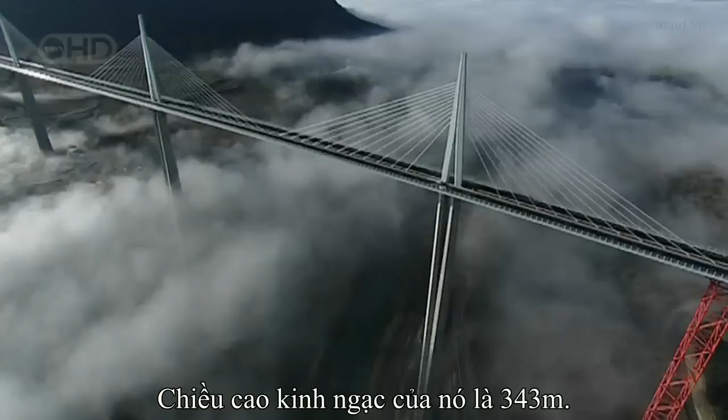This is the Millau Viaduct, the tallest bridge in the world. Its highest tower stretches a staggering 343 meters. So high, the bridge glides above the clouds. But this is a megastructure they said couldn't be built. When I first showed the drawing of this bridge, they really thought I was crazy.

The team attempting to build this amazing freeway in the sky had to survive landslides, fight winds gusting at 130 kilometers an hour, and weather massive storms as the bridge simply hung in the balance. It's a bridge that pushes the boundaries of engineering to the limits, and then beyond.

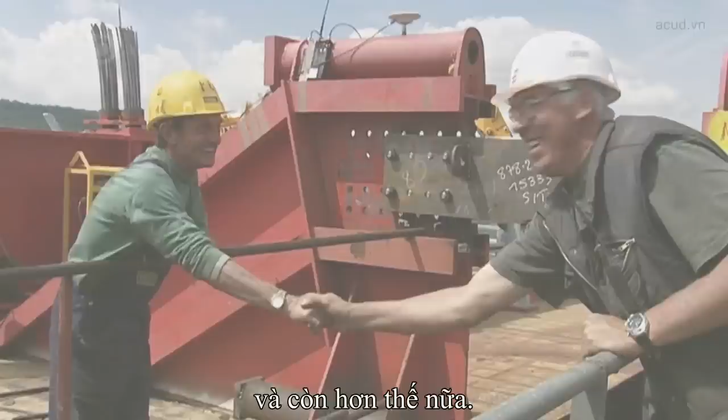Imagine building a series of Eiffel Towers, then slinging a 4-lane highway between them, all the way across one of the deepest valleys in France. Impossible though it sounds, that pretty much describes the building of the Millau Viaduct.

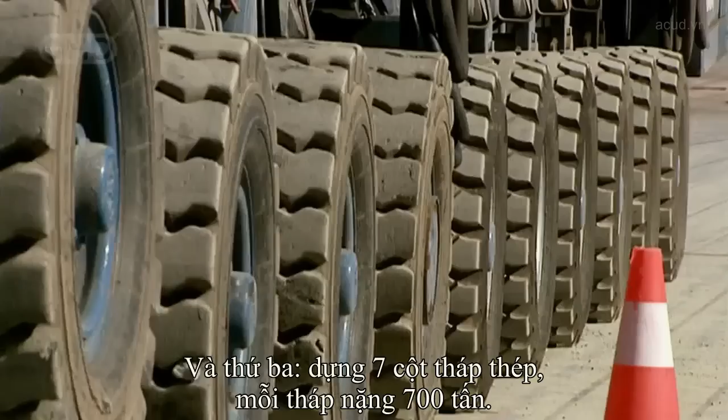From the start, the construction team faced 3 daunting challenges. 1. Build the tallest bridge piers in the world. 2. Put a 36,000-ton freeway on top of them. And 3. Erect 7 steel pylons, each weighing 700 tons. And what's more, they had to do this hundreds of meters above solid ground. So high that if you were on top of the Eiffel Tower, you'd still be looking up at this awesome bridge.

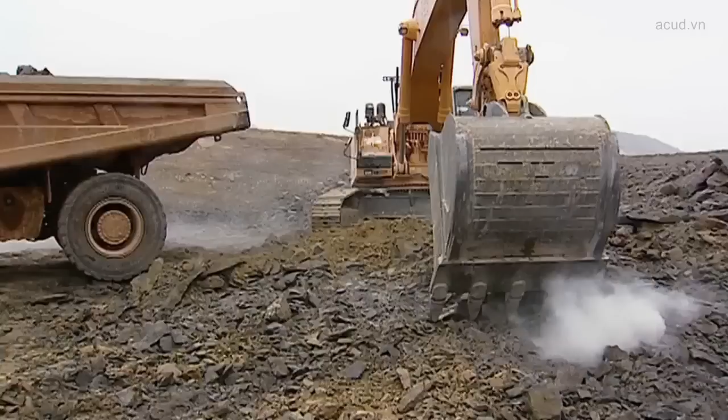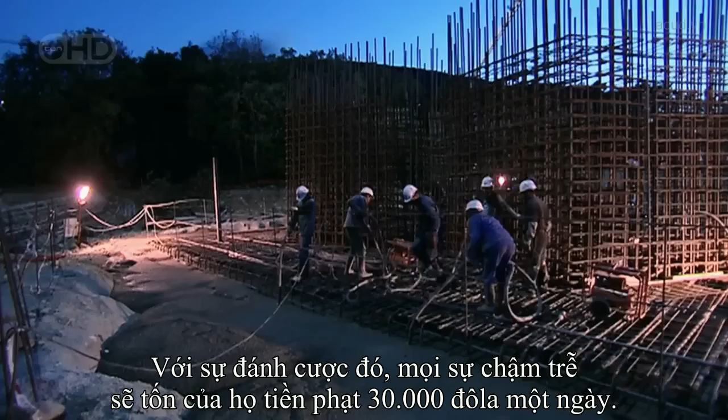October 2001, the team break ground. They're required to build a bridge that'll last for 120 years. And to win the contract, the team promised to build it in record time, less than 4 years. By comparison, the world's longest suspension bridge, the Akashi Kaikyo in Japan, took a full 10 years to build. To up the ante, any delay will cost them $30,000 a day in penalties.

There are 7 piers that are numbered from the northern end of the valley. Number 1 will pose problems because of the steep slope. Number 2 will be the biggest challenge since it's the tallest. Crossing the river, number 3 is not much shorter. Then 4, 5, 6, and 7 climb the gentler slope to the south.

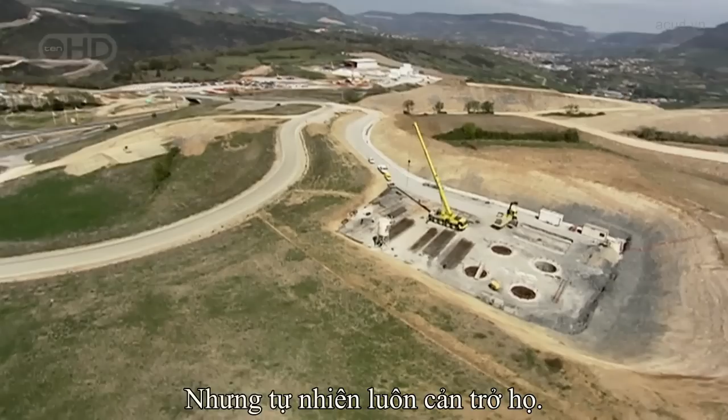To begin, the team had to bury the foundations deep in the bedrock in order to support the enormous weight the bridge will place on them. But the forces of nature were stacked against them. Geologists have warned of the risks posed by the region's fractured limestone. The rock is full of cavities that are essential to the local cheese economy. These cave systems, close to Millau, are home to a unique bacteria responsible for the blue mold in the world-famous Roquefort cheese. But what's perfect for cheese could be disastrous for a megastructure.

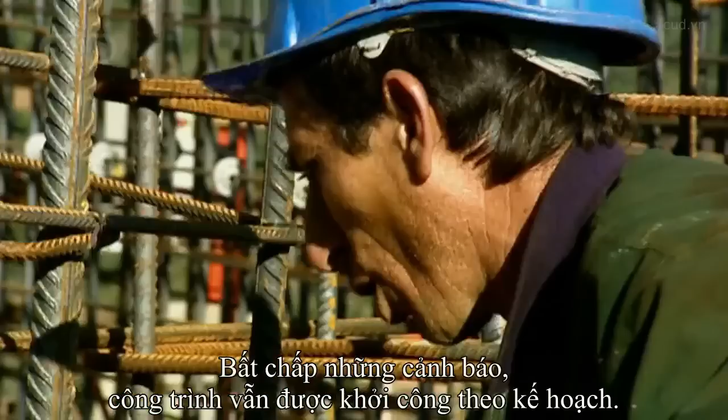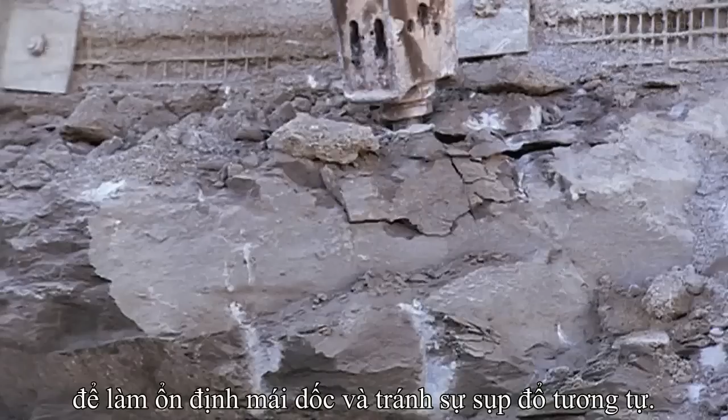The geologists' diagnosis spelt one thing: landslides. This kind of catastrophe could jeopardize the entire project. Despite the warnings, building went ahead as planned. Then, well into construction, as predicted, a dramatic storm causes a landslide. 4,000 cubic meters of rock collapse around Pier 1. Fortunately, the fallen rock doesn't damage the pier, but the warning is clear. They're forced to divert precious manpower and equipment to stabilize the slope and prevent a repeat collapse.

So if the area is prone to landslides, why did they build the world's tallest bridge here in the first place? The answer is simple. In the 1980s, France built a freeway linking Paris directly with Spain. This major artery headed south across the French countryside, while from the Mediterranean, the freeway headed north, until they both hit one of the deepest valleys in France and stopped dead. Welcome to Millau, France's least favorite bottleneck.

The town of Millau is in the mountainous region of the Massif Central, one of the most tranquil parts of France. But in summer, this poor medieval town suffered traffic hell. The locals couldn't take it anymore. Neither could their mayor. It was terrible for our reputation. When you hear every day on the television and radio, avoid Millau, there's a traffic backup, a 5-hour wait in Millau.

And it's not just the people of Millau. Two drivers, Jamila and Jemima, crossing the 30-odd kilometers between the freeway on either side of Millau, reveal exactly why this bridge is needed. Jamila, in car 33, will cross the new bridge, while in car 22, Jemima will take the old road across the valley floor. Getting straight on the freeway, car 33 approaches the Millau Bridge after just 18 minutes. The only delay is the 30 seconds it takes to get through the toll booth. Then driving at 100 kilometers an hour over the spectacular bridge, she takes just 32 minutes to get to the other side.

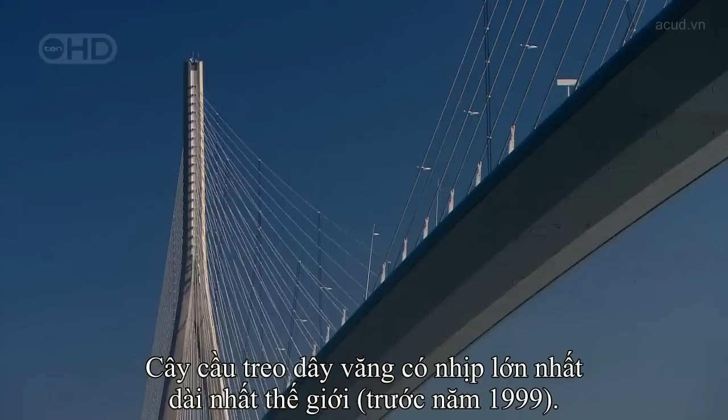12 years before construction began, up in Paris, the Ministry of Transport first came up with a plan. Their head bridge builder, Michel Virlogeux, is no ordinary engineer. He's a man who thinks big, very big, like the Normandy Bridge in northern France, the longest cable-stayed span in the world. With this record-breaking structure completed, Virlogeux was on to his next, Millau. His plan, another cable-stayed bridge, but pushing the technology beyond anything previously attempted, with piers 4 times higher than the Normandy Bridge.

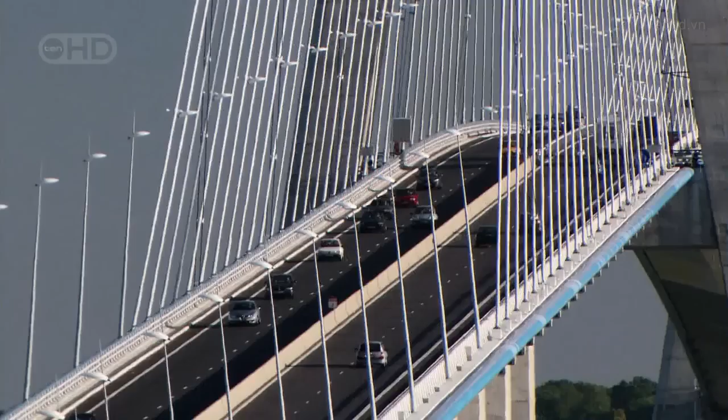The Millau Bridge would not only be the world's tallest, it would be unlike any bridge ever constructed. When I first showed the drawing of this bridge to the authorities, they really thought I was crazy. Virlogeux's Normandy Bridge has 2 sets of cables supporting the deck. But he wanted to up the stakes for Millau by losing 1 row of cables, so the remaining line would be forced to do twice the work.

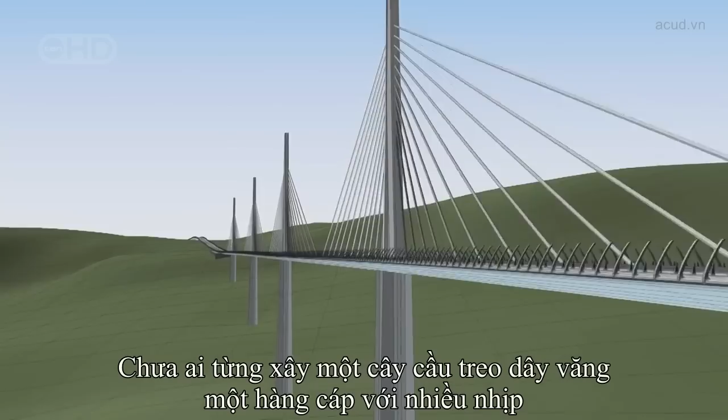More dramatically, the 2.5-kilometer Millau Bridge, instead of having a single main span, needed a whole series of piers to support it across the valley. No bridge builders had ever attempted a multiple-span, single-line cable-stay bridge on this scale before.

The French authorities had a problem. Nervous about Virlogeux's groundbreaking scheme, they held a competition inviting other engineers and architects to compete with different designs. The winner, Lord Norman Foster, is one of the world's superstar architects. In Hong Kong, he built the world's largest airport terminal. In Barcelona, offices literally hang from a mast on his communications tower. This is a man who regularly contemplates the impossible and delivers.

You know, it's the challenges, and it's one challenge on top of another, on top of another. And with Millau, one of the biggest challenges was making it fit into the landscape, given it's just down the road from the famous Gorge du Tarn, France's equivalent of the Grand Canyon. How do you make something which has to be so immensely strong against the forces of nature look very gentle, very delicate? How do you weave something on that scale into the most unbelievable landscape?

Ironically, Foster's answer was to take Virlogeux's pioneering scheme, then push it one stage further. He turned an elegant piece of engineering into a delicate work of art by boldly cutting out 2 of the 9 original piers and seriously slimming down the remaining piers and road deck. Foster wanted the bridge to appear as delicate as a butterfly, but this butterfly has to support the weight of 5 Eiffel Towers in gale-force winds hundreds of meters above the River Tarn. Getting the design wrong would be a disaster.

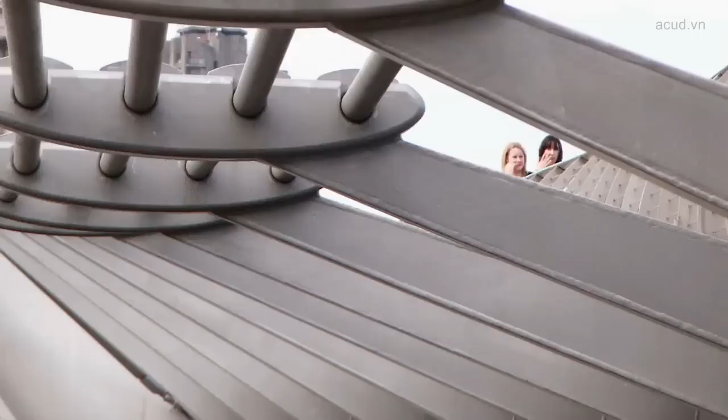Then, with Millau still on the drawing board, Foster's record as a bridge builder suffered a major setback. His Millennium Bridge in London is actually another record-breaking structure, the lowest profile suspension bridge in the world. But when this footbridge opened to the public in June 2000, it was a public relations disaster. Crowds walking over it set up a resonant frequency, and the bridge began to sway. As people adjusted their step to the small initial wobble, the effect was magnified.

Though it didn't threaten the structure, the swinging motion became so dramatic, the authorities closed the bridge for a refit that took 1.5 years and ended up costing over $8 million. It was a bad omen for the Millau Bridge, where construction was soon to begin. And at 15 times the height, a design flaw would be a catastrophe.

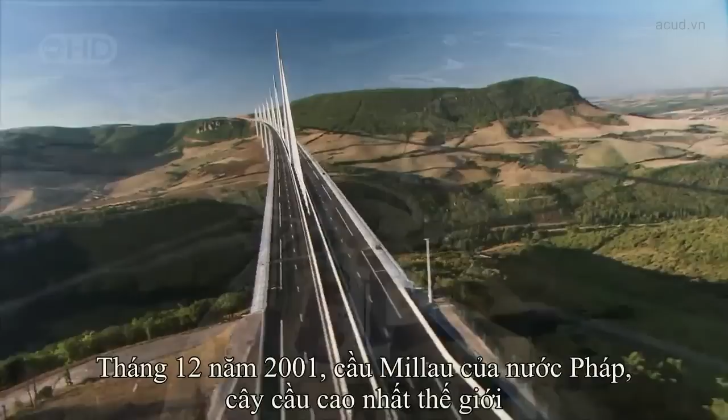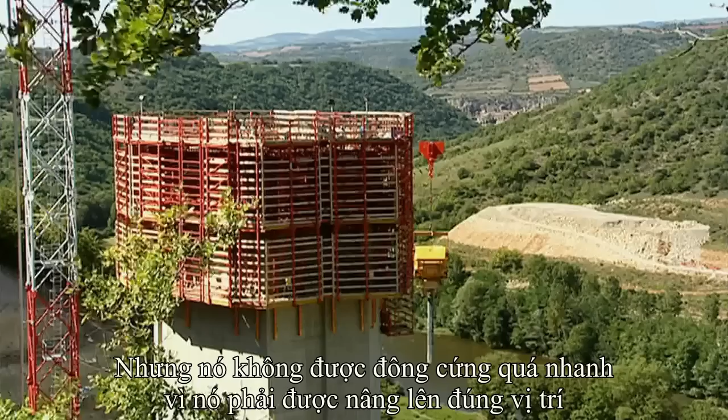December 2001, France's Millau Viaduct, the tallest bridge in the world, is under construction. Everything about this project is supersized. It'll need 200,000 tons of concrete, so much that the team have to build a concrete factory on site. But there's nothing straightforward about this concrete. The formula must be just right. It needs structural strength to support the massive loads it'll have to bear. But it can't set too quickly, as it has to be hoisted into position and poured hundreds of meters in the air. And it needs to be just the right color to suit Norman Foster's vision.

In fact, the architect's vision has created a headache for the construction team. He's designed each pier as a complicated geometric shape, tapering the entire way up with vertical grooves set into them to create shadows. But what's just a line on paper for the architect was a major challenge to build.

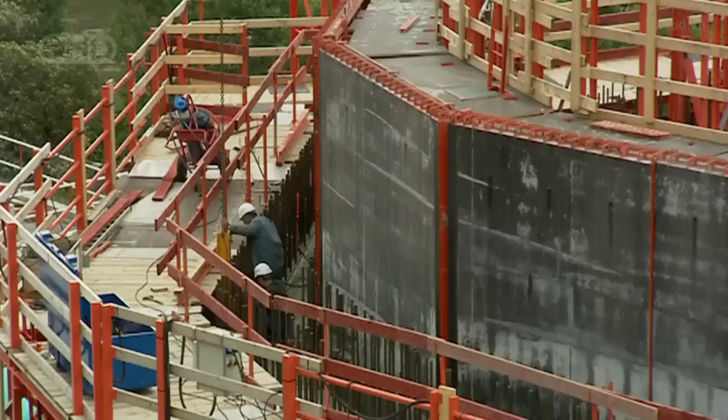The enormous piers are built step by step by pouring concrete into a temporary mold. To give the required strength, the molds are filled with a frame of steel reinforcing bars. In total, 16,000 tons of these steel bars are hoisted into place and secured. Laid end to end, they'd stretch the 4,000 kilometers from Millau all the way to Central Africa.

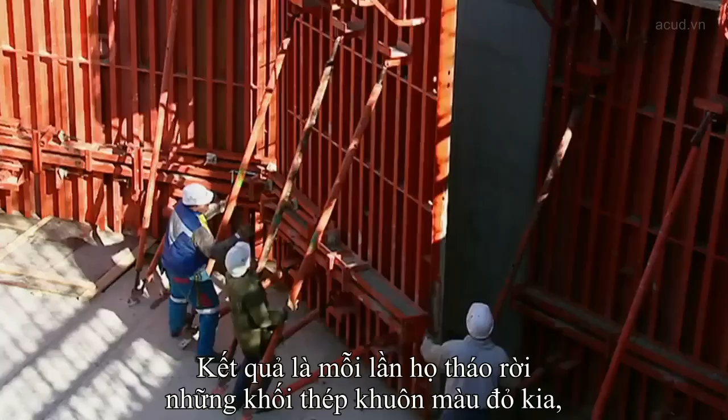The shape of each pier is seriously complicated. As a result, each time they remove the sections of red steel shuttering, they have to change the shape of the mold to fit the profile of the next 4-meter section. Manhandling these steel panels, weighing up to 15 tons apiece, is no picnic. And with the combined height of the 7 piers totaling well over a kilometer, they have to change the shape of the mold over 250 times.

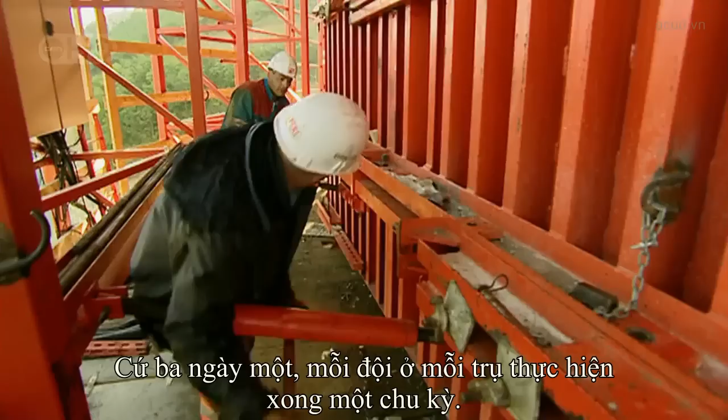Every 3 days, each team on each pier went through this whole cycle. Then they repeated the process. But it was a race against time, with a permanent threat of delay. Keeping the entire build on time and to budget was the daunting responsibility of one man, Jean-Pierre Martin.

If instead of 3 days we took 4, imagine that multiplied by the number of castings. We'd end up with a 3 or 6 month delay. With a penalty of nearly $1 million a month, this isn't something Martin wanted to contemplate. And this schedule wasn't his only headache.

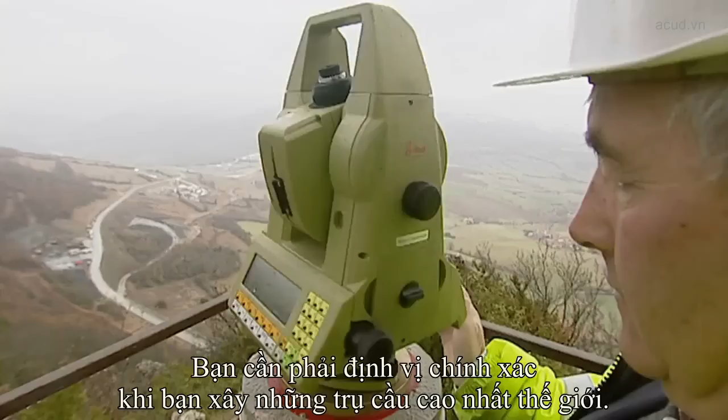You have to be pinpoint accurate when you're building the tallest bridge piers in the world. Get it wrong, and the bridge simply won't fit together. Just 10 centimeters out, about a hand's width on each 4-meter section, and the tallest pier could be 6 meters off at the top, the width of a jumbo jet fuselage.

Each team was aiming for a specific point in the sky. For Pier 2, this was exactly 245 meters above the ground, 546 meters from the north side, and 1,914 meters from the southern end. There was no room for error.

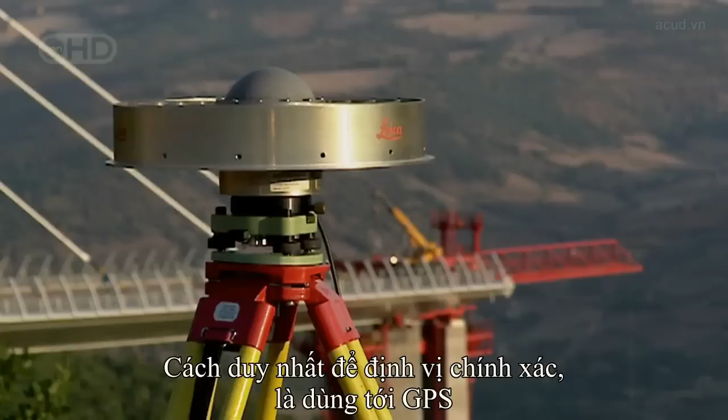The only chance they had to get it right was with GPS, accurate to within 4 millimeters. Using signals from multiple satellites, the team could pinpoint their position and make sure they're on target for that critical point in the sky they needed to hit.

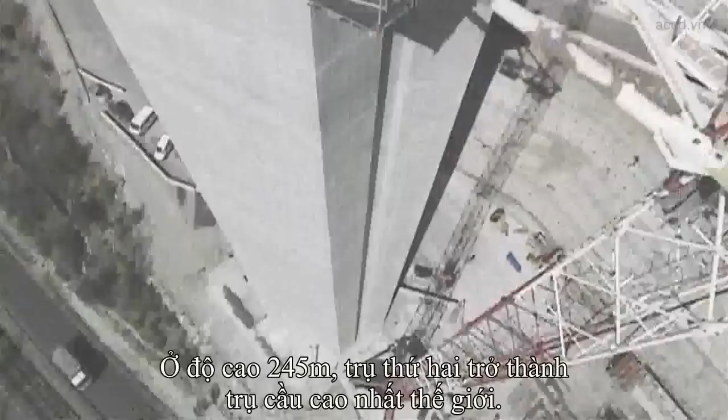Month after month, the piers climbed higher. Finally, by November 2003, they reached their full height. At 245 meters, Pier 2 becomes the highest bridge pier in the world. But is this record-breaking pillar where it's supposed to be? Amazingly, it's dead on target, to within 2 centimeters.

Champagne corks pop. It's time for a major celebration. Against all the odds, they were 1 month ahead of schedule, but the team couldn't afford to relax. The next stage of the project would be the most difficult part of the build.

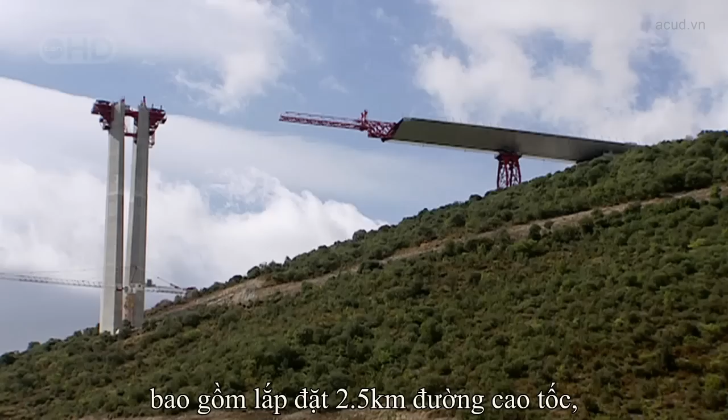Phase 2 of building the world's tallest bridge involved putting a 2.5-kilometer roadway weighing 36,000 tons on top of the piers, a full 270 meters above the River Tarn. Bridge builders know danger comes with the territory, but working at these heights can be lethal.

More than 34 died constructing New York's Brooklyn Bridge. 35 died in 1970 on the Westgate Bridge in Melbourne, Australia. And 1 year later, 13 workers were killed when the Koblenz Bridge in Germany collapsed into the Rhine.

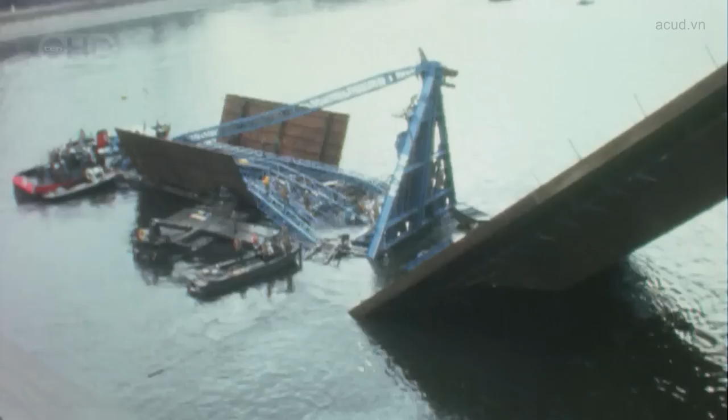With these fatalities in mind, the team decided to fabricate the entire road deck on the safety of solid ground. This meant building it in steel, which in theory would be much safer than lifting vast concrete sections hundreds of meters into position. There's only one problem with this plan. No one had ever put a road deck on piers anything like this height before, let alone over a 2.5-kilometer span.

In the end, only one steel manufacturer had the courage to take on this colossal challenge. Eiffel, the steel firm set up by the great French engineer. Eiffel built what was once the tallest bridge in the world, the Garabit Viaduct in southern France, before getting round to the framing for New York's Statue of Liberty and, of course, his signature tower in Paris.

But despite the company's experience, Eiffel's director, Marc Buonomo, knew he was taking a serious risk. It was a gamble for the company, because if there had been a mistake, if it hadn't worked, it would have been the whole company.

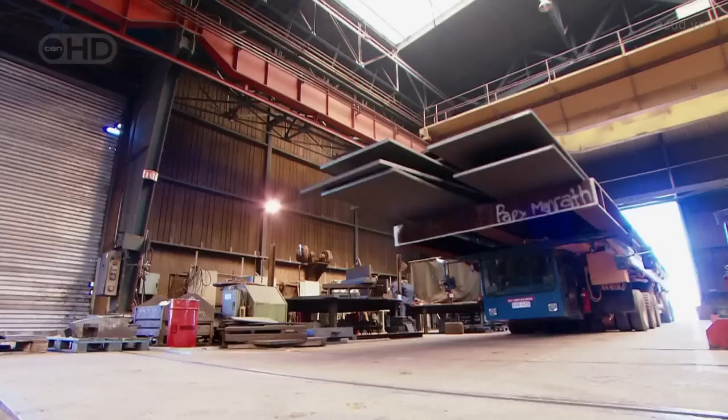They fabricated the massive sections that would make up the road deck in the company's steel factories. This immense jigsaw puzzle involved manufacturing 2,200 separate sections, weighing up to 90 tons, and some of them 22 meters long. Their accuracy is measured with a laser to within a fraction of a millimeter.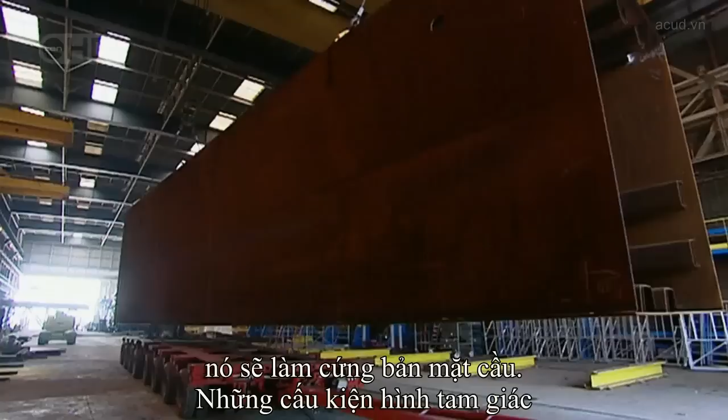The huge square tubes are the central spine that should make the deck rigid. The triangular side panels will be welded on either side to create the width for a 4-lane highway. To meet the punishing schedule, Buonomo automated the manufacturing with a 2-headed welding robot and a plasma cutting machine.

Each cutting pattern or template is programmed into the computer. Then the machine automatically blazes its way through the steel. The torch reaches a scorching 28,000 degrees centigrade. That's 5 times the temperature of the Earth's inner core.

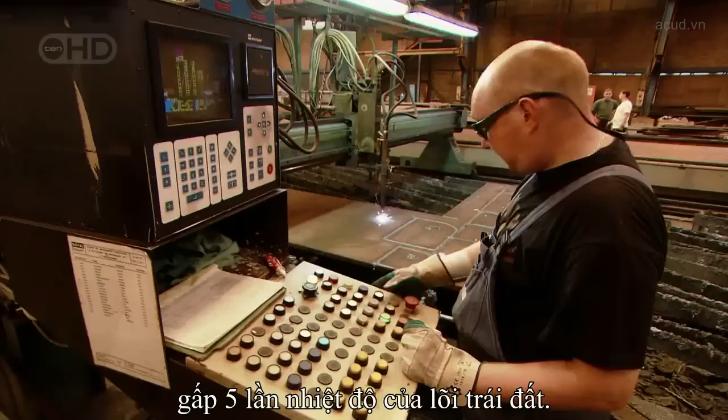But cutting and welding was the easy part. The hard part was getting these monster sections the hundreds of kilometers from the factories to Millau. The routes had to be planned with precision to avoid major damage. The police coordinated safety and clearances.

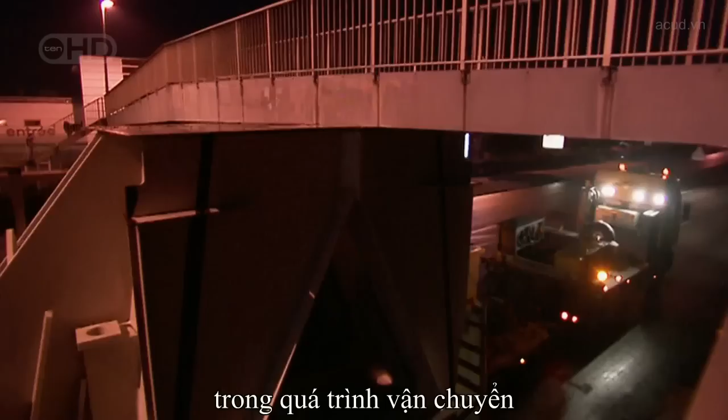Even with that level of preparation, some obstacles felt as if they're cutting it just too close for comfort. And this was no one-off event. To build the viaduct took over 2,000 of these extraordinary road convoys.

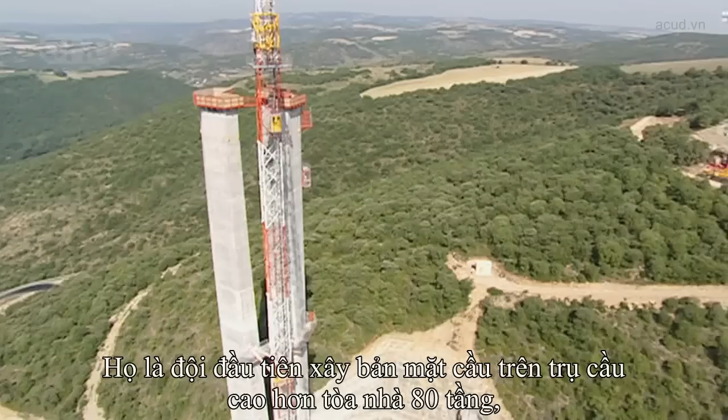The components arrived at assembly plants set up, one on either side of the valley. Here, the pieces of the massive jigsaw puzzle were welded together to form the 2 halves of the deck. But getting these 2 halves to span the valley on top of the world's tallest bridge piers would be a major challenge. They'd be the first team to put a road deck on a pier taller than an 80-story skyscraper.

And pushing bridge building beyond anything attempted before, they planned to slide the entire 2.5-kilometer road deck over in 2 colossal pieces. The bridge's chief engineer, Jean-Marie Kremer, was one of the few people who believed it could be done. All the engineers who know this method, who were in the know, didn't believe it was possible. If the team had got their calculations wrong, the entire structure could collapse into the valley.

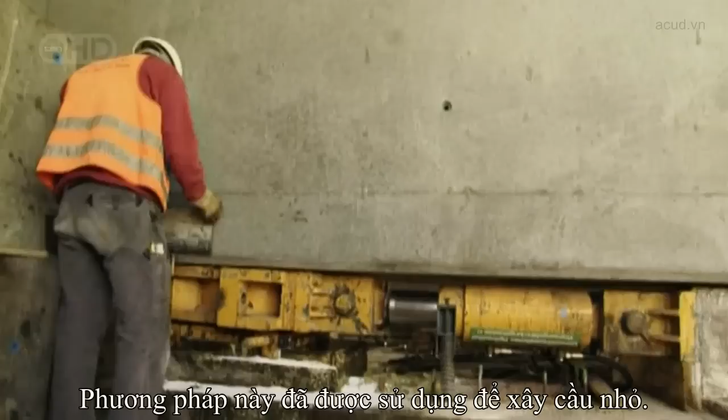We found a solution for the construction, which was to launch the bridge from the 2 sides. One part on the Larzac Plateau, one on the Rouge Plateau. And to push them from the 2 sides and to make them come and meet here above the River Tarn. Smaller bridges use a similar technique. A powerful set of hydraulic rams literally pumps the deck from one side to the other. But Millau would be the longest launch ever attempted over the highest piers in the world, and the results could spell disaster.

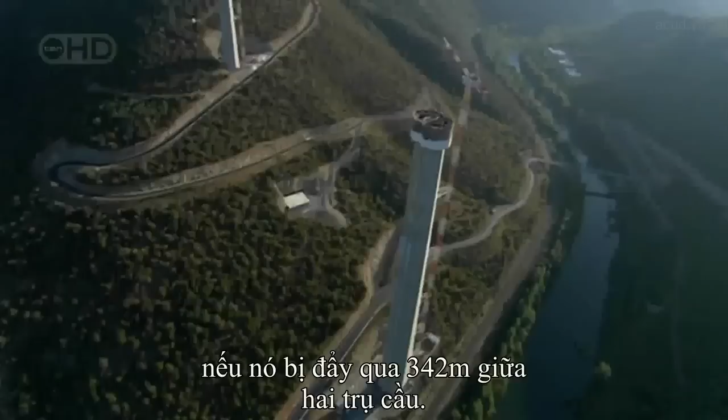The deck is so slender, it would bend and collapse if it were pushed out over the 342-meter spans between each pier. The furthest anyone's previously managed is less than half that distance. The first part of the solution was simple. Fit a pylon so its cables support the front of the deck as it goes out over the valley. Then construct temporary steel support towers that halve the spans to a more manageable 171 meters.

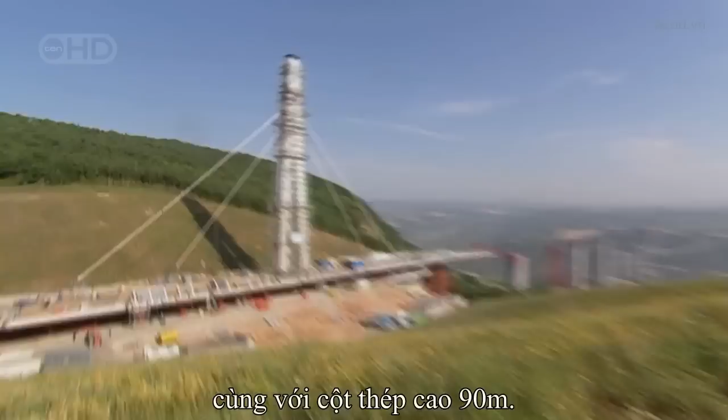These steel towers were a construction feat in themselves. The largest, over 170 meters high, is the tallest ever built, and they needed to carry a massive load. 7,000 tons as the leading edge of the deck, together with the first 90-meter pylon, slide over. And simply pushing this enormous weight over the top of the vulnerable piers would bring them crashing to the ground. This was the nightmare scenario. If we'd done a conventional launch, we would have knocked the piers over like the pins in a bowling alley.

Someone needed to reinvent the way this type of bridge is built. And it's Marc Buonomo with Jean-Marie Kremer who came up with the breakthrough. The basic principle can be demonstrated with a heavy box and a wobbly table. With a normal launch, you knock over the piers. I want to advance the deck over the pier, but if I push the deck from here, I'd knock over the piers, because they're so tall. The idea is to install a launching system on top of the pier, and that way, if I push the deck, it has no effect on the stability of the piers, and the piers won't fall over.

The trick is to use a series of these launching systems to jack up the deck and inch it forward. Each system uses two wedge-shaped blocks under each side of the deck. The upper wedge is pulled forward by a hydraulic ram. It slides up the slope of the lower wedge at the same time, lifting the deck from its supports and advancing it 600 millimeters. The lower wedge then retracts, dropping the deck onto its supports. The upper wedge returns to its original position, and the whole cycle begins again.

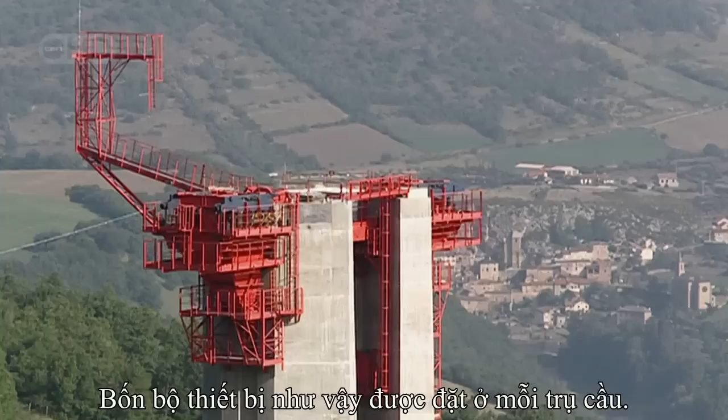4 of these clever devices are placed on each pier, all programmed to work at exactly the same time. The result is that together, they pick up the entire roadway and shunt it forward. But if one fails or gets out of step, it could spell disaster. The force could push the bridge piers apart till they collapse. When you're up there and you see Millau 300 meters below you, you ask yourself, was this a good idea? The future of the entire project was now hanging on a prototype, and it had never been tested.

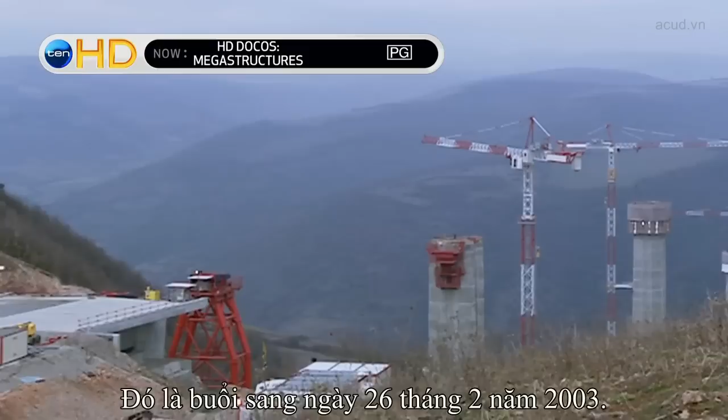It's the morning of February 26, 2003. Do or die day for the world's tallest bridge. Everything is about to be put to the test. The flexibility of the deck, the strength of the temporary piers, and critically, the pioneering hydraulic ram system. Even Buonomo, the man in charge of the launch, had his doubts. As it had never been done before, I have to tell you, I had fears that it wouldn't work.

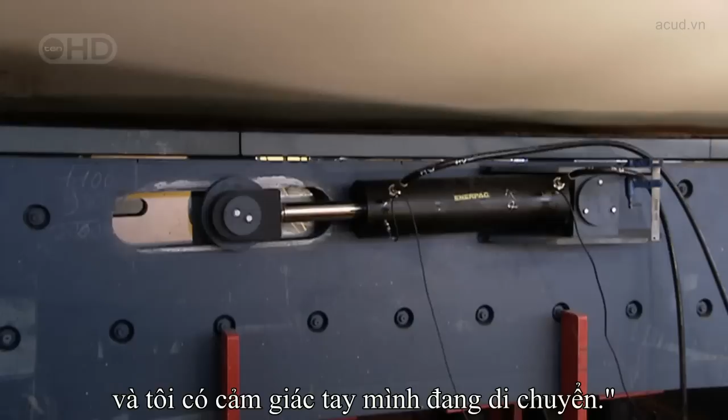The pumps kick in, the pistons start to push, and the deck begins its huge journey across the valley. The moment I heard the motors start, I put my finger on the deck, and I could feel my finger move. Every 4 minutes, the deck advanced 600 millimeters across the valley. Surveyors tracked its progress. But it was still a nail-biting time as they watched the unsupported deck crossing the void.

Eventually, the deck reached the safety of the first pier. 204 meters down, only 2,256 to go. The launching system seemed to be working as planned. The engineers were feeling optimistic.

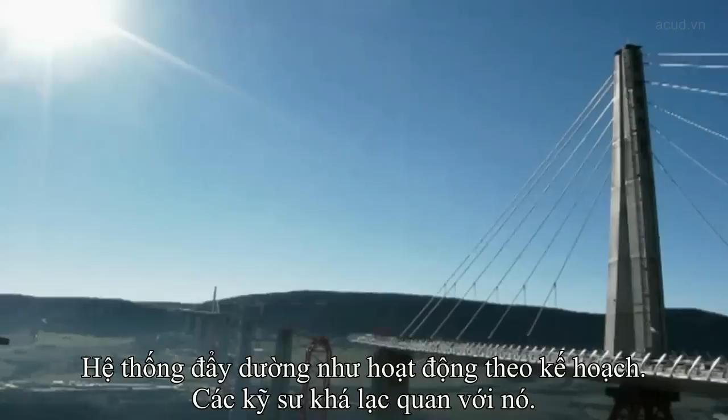But as the deck advances into space, it'll become more vulnerable to the wind, which can reach 130 kilometers an hour. Unfortunately, the road deck has the shape of an upside-down airplane wing, and the team's greatest fear is that this wing could simply take off.

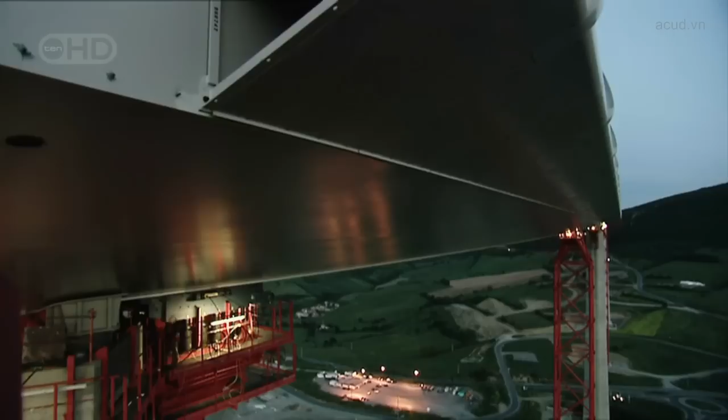The engineers kept a close eye on the wind and weather conditions. When they were satisfied there was a 3-day weather window and the wind wouldn't exceed 85 kilometers an hour, they'd give the construction team the go-ahead, and the deck launch could continue. The reason for this precaution is simple. Strong winds can literally tear a bridge apart.

In 1940, Washington State built a suspension bridge across the Tacoma Narrows in the US Northwest. It opened with a grand ceremony on July the 1st. But the celebrations were short-lived. The bridge had a major problem: the wind. Girders beneath the deck, designed to make the bridge rigid, actually blocked the wind, causing the roadway to ripple alarmingly. Locals soon dubbed it Galloping Gertie.

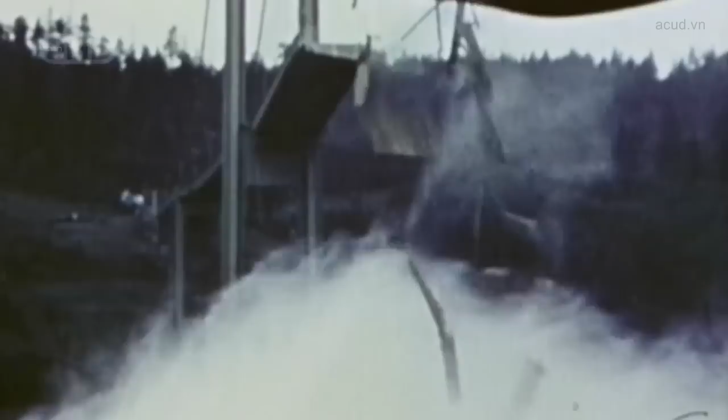On the 7th of November, with the wind less than 70 kilometers an hour, the bridge begins to twist violently. At 11 a.m., time runs out for Galloping Gertie. The wind sends the bridge crashing into the river. Wind tunnel testing is now standard procedure as a direct result of Galloping Gertie.

For the Millau Bridge, they analysed the wind in the Tarn Valley over 18 months, then recreated those conditions in the wind tunnel. Wind engineer Olivier Flamand was shocked by the results. The average wind speed was relatively low, but because there's such strong turbulence, it created very fast peak winds. The rugged terrain creates serious turbulence at the height of the road deck. Winds peak at 130 kilometers per hour. That's hurricane force.

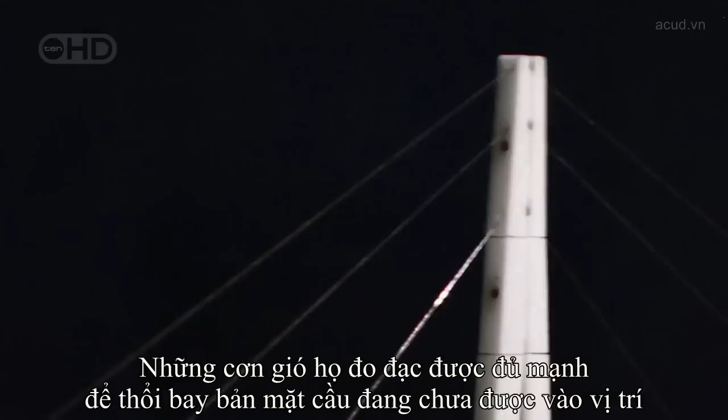They tested every aspect of the bridge to analyze the risks: piers, pylons, and critically the deck. But it's not just the aerodynamics of the finished bridge. They needed to find out how it would behave when it was most at risk, during the launching of the deck. Olivier and his team reached a chilling conclusion. The winds they've measured are strong enough to blow the unsecured deck off its supports and send it crashing hundreds of feet to the valley floor.

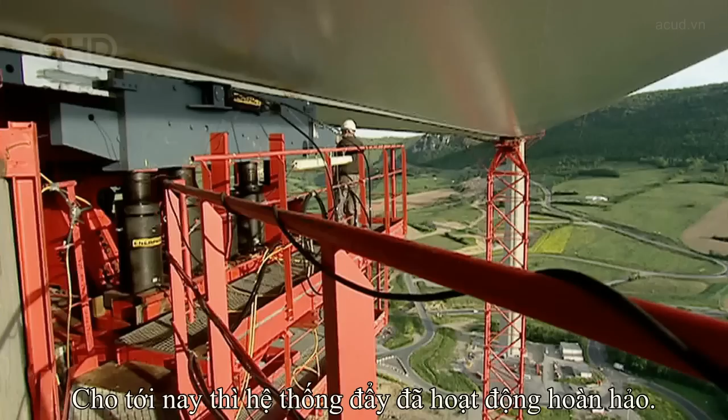And then the nightmare began. On the 22nd of August 2003, 6 months into the deck launch, one of the launch systems failed, leaving the deck hanging in the wind. To make matters worse, the weathermen were predicting storms. So far, these massive pumping machines had worked perfectly. But the fact is they were prototypes, and due to the frantic schedule, they'd never been tested.

The problem was that the non-stick Teflon between the sliding surfaces had ripped, and the friction generated was too much for the hydraulic rams to push against. Unfortunately, no one had planned on replacing parts of this monster machine mid-launch on the top of a massive concrete pillar. This was very bad news for the man who staked his reputation on this system. It was maximum stress, like poison in your mouth. You don't forget that.

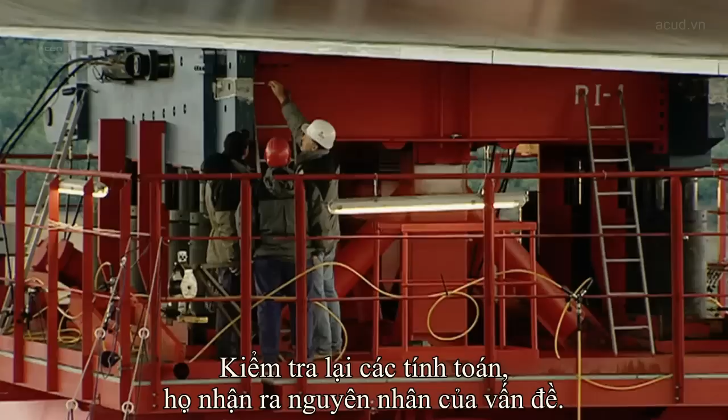Re-examining their calculations, they realized the cause of the problem. They'd underestimated the forces between sliding surfaces, but they wouldn't be able to repair it without the necessary spare parts. The clock was ticking, and Marc Buonomo needed a solution fast. When Apollo 13 came back with that incident, the NASA engineers requested they did the inventory of everything there was on board to know how to fix it.

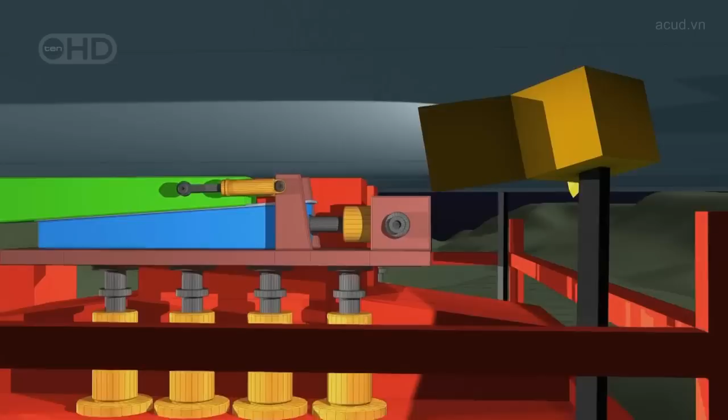The Millau team did an inventory. They realized that the other launching machines, not yet being used, could be stripped to provide the new Teflon surfaces they needed. Working all through the night, the team extended the access platform. This allowed them to take out the 5-meter-long, 2-ton steel wedges, replace the Teflon, and reassemble the launching machine. By 8 a.m. the next morning, it was ready to resume the launch.

The rest of the week, the predicted storms arrived, and another set of launching machines wore out. So when the deck finally made it to the safety of the next pier, the team breathed a major sigh of relief. You don't forget that. I won't forget that for 4 hours I was really scared. The two decks continued their journey across the valley. Day after day, week after week for a full 14 months, they approached each other, millimeter by millimeter.

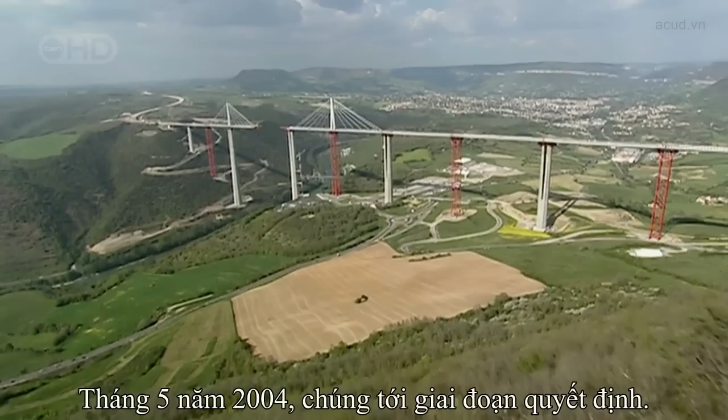By May 2004, they'd reached a critical phase. From the northern end, the shorter deck had traveled 717 meters into space to reach its final resting place. From the south, the longer deck extended over 1.5 kilometers. Only the section over the river, the one point where it was impossible to erect a temporary pier, divided them.

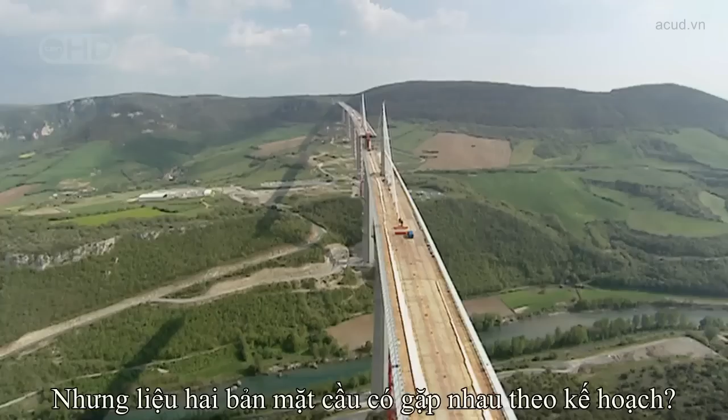But would they meet as planned? If they've got their calculations wrong, they'll have built the biggest white elephant in Europe. Even the man behind the whole project had his doubts. I was not convinced at all that the two parts of the deck could meet exactly with a perfect geometry.

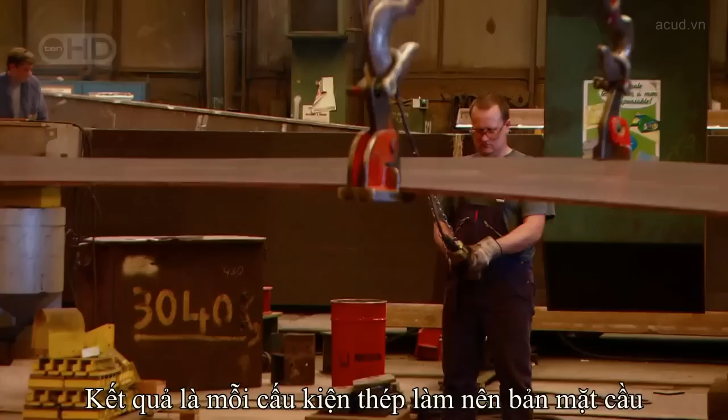The odds were against them. Calculating such a feat so precisely is a Herculean task. Firstly, the two starting points on the northern and southern slopes of the valley are at different heights. Secondly, the bridge has a subtle curve to it. As a result, each steel panel which makes up the road deck had to be cut and welded with extreme precision. It would be an engineering triumph if they got these two sloping curved decks to meet as required.

The team checked the weather reports. With the wind inside safety limits, they gave the go-ahead for the final push. The rams began to drive the deck's leading edge off the safety of Pier 3 towards its destination. At this point, a total of 21 launching systems needed to move at exactly the same moment to avoid disaster. If anything were to go wrong now, the man responsible would be Marc Buonomo.

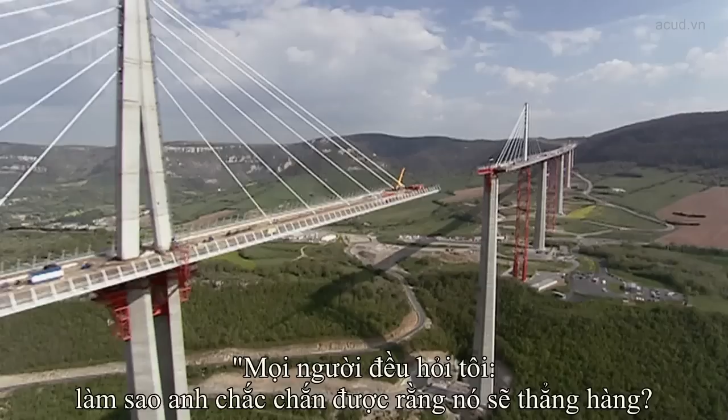Everyone asked me, how can you be sure that it will go straight? So to be sure that they were going to the right place, I had a GPS put on the front, so I could see the gap between the theoretical and the real position. Over the next 2 days and nights, the deck advances 600 millimeters at a time towards its final resting place. The world's media are watching the critical meeting of the decks. And to add to the pressure, the French Prime Minister is due to drop in to celebrate the event.

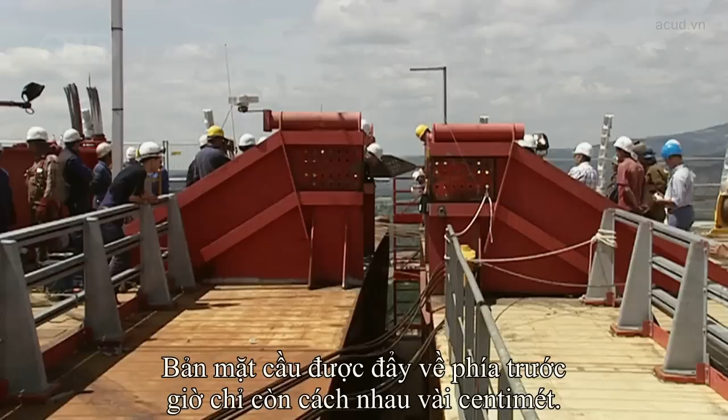The deck pushes forward. Now, with only centimeters separating the two sections, a magnum of champagne is hung between them to mark the moment. At last, union. The two massive steel decks have traveled high over this valley, a total of 2.5 kilometers, and when they check, they're aligned to within 1 centimeter. That's accurate to within 99.9999%. All the measuring, all the calculations have paid off. They've nailed it.

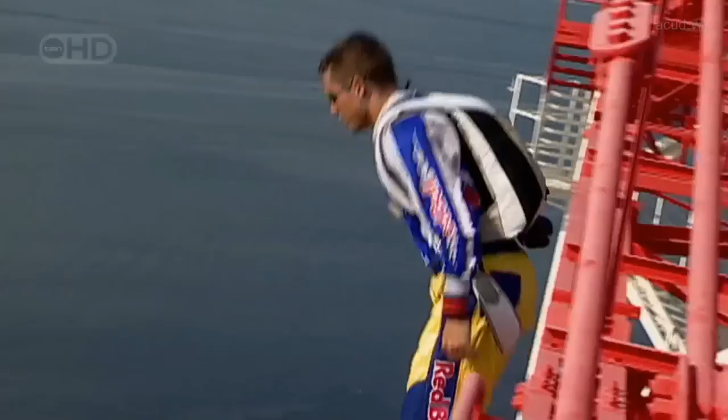The meeting of the decks was a special moment. News reports traveled round the world, and in Salzburg, Austria, they reached Felix Baumgartner, aka Felix the Conqueror. Felix has made a career base jumping from some of the tallest structures on the planet, and within 24 hours, he'd driven to Millau and was calculating the logistics for the jump. Factoring in his two main aims, to avoid arrest and death.

Baumgartner waited for darkness before arriving on site. He found his way to the base of Pier 2, then climbed an access ladder the full 245 meters to the top. He entered the steel road deck and found a place to hide until daybreak. He had to remain concealed until the sun was high enough for his cameramen to record his world record attempt.

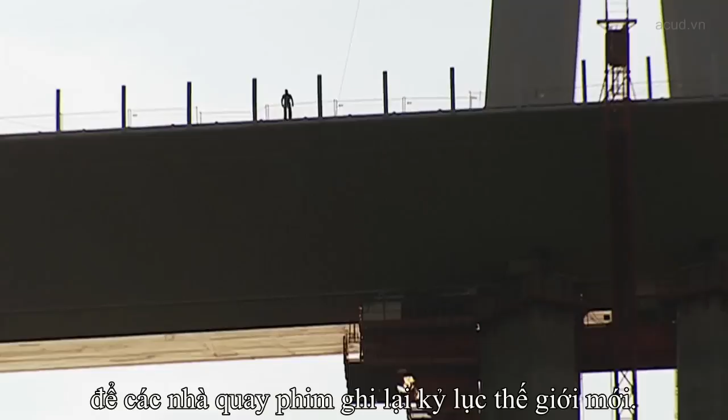At 7 a.m. the following morning, Felix the Conqueror emerged. He took a cool backward flip off the tallest bridge in the world and entered the record books. The tallest bridge in the world, 250 meters. I did it. And having evaded death, he made sure he's not caught by the police.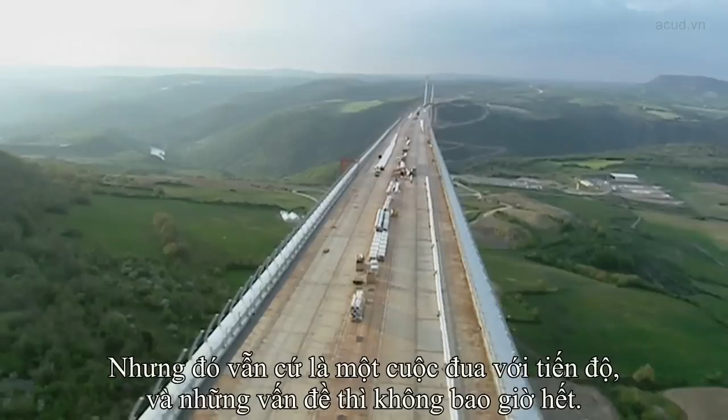The decks have been joined, and the team have reached the final phase of the project. But there was still a race to meet the schedule, and their problems weren't over yet. Everyone could see the dramatic undulations in the flexible steel deck. Even some hardened bridge builders wondered about its structural integrity. It was a huge surprise for everyone. All the engineers said, we knew steel was flexible, but not that flexible.

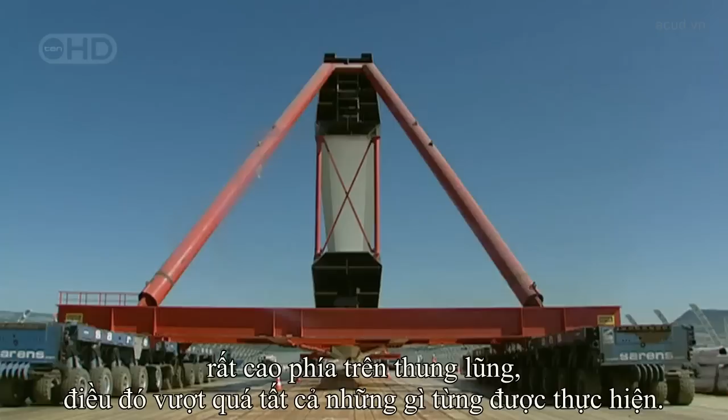The team were relying on the pylons and cables to pull the deck straight. Each massive pylon is 90 meters high and weighs 700 tons, the equivalent of 85 London buses. Placing them in position on the slender deck, high above the valley floor, would go beyond anything ever attempted. Once again, Marc Buonomo had a plan. You know, the first people to make vertical pylons were the Egyptians. Buonomo adapted a technique used in ancient Egypt to erect obelisks in the sands.

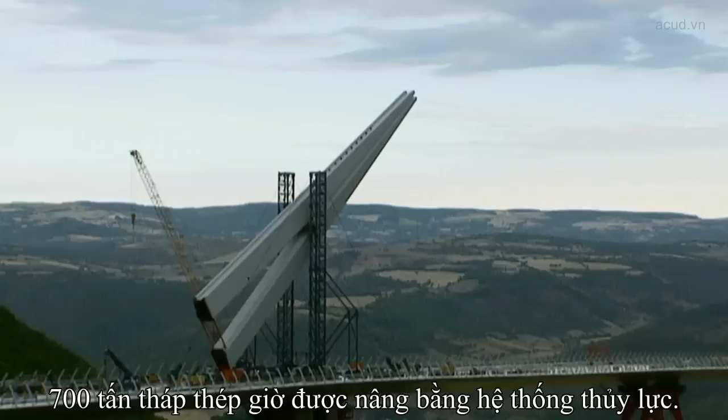On top of the road deck, the team put up two enormous steel towers, both of them secured by cables and equipped with a hydraulic system capable of raising 1,000 tons. The 700-ton pylon is then lifted by the hydraulics. As it rises, it pivots little by little until it's vertical. It's then lowered safely onto its anchorage point. Buonomo's 4,000-year-old technique worked to perfection.

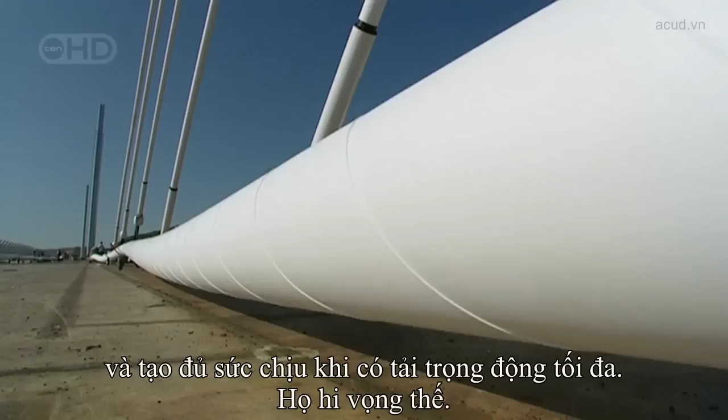With all 7 pylons in place, the team could attach the cable stays that would straighten the rippling deck and give it the strength to cope with full traffic loads. They hope. The weight of the roadway is now over 40,000 tons, the equivalent of a cruise ship, and the 154 cable stays should prevent it from sagging or collapsing. The strongest stays are made up of 91 individual steel strands and have a breaking strength of 25,000 tons, strong enough to hold back 25 jumbo jets, all at full throttle.

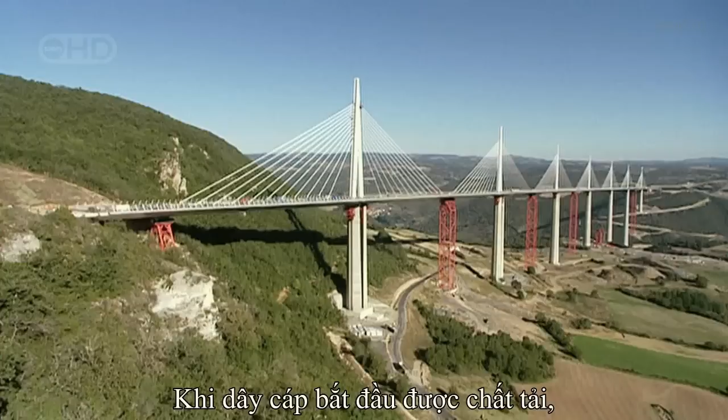As the cable stays are tensioned, true to plan, the ripples in the road deck are pulled straight. Over the 2.5-kilometer deck, the ripples are now no larger than the size of a thumb. They're finally on the home straight. The road surface goes on, adding a further 10,000 tons to the load. That's like driving 153 battle tanks onto the deck. But before it could open to the public, the team needed to know the bridge is safe. It would have to pass one crucial test.

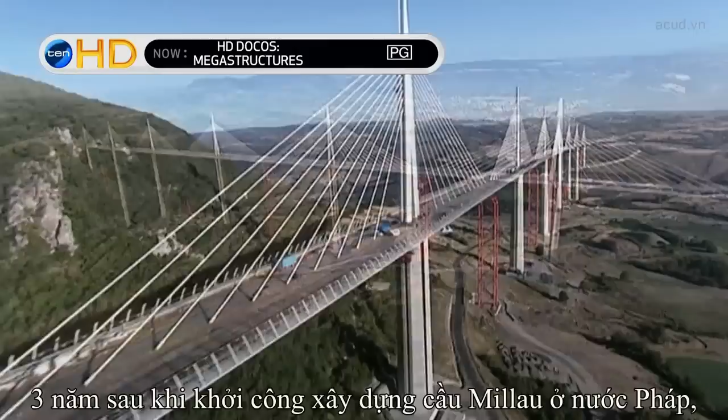After 3 years, the construction team building France's Millau Viaduct, the world's tallest bridge, are about to find out if they got their calculations right. On a single-span cable stay bridge like the Normandy Bridge, a large load on the main section is no problem because the cables are attached to solid ground and can't give.

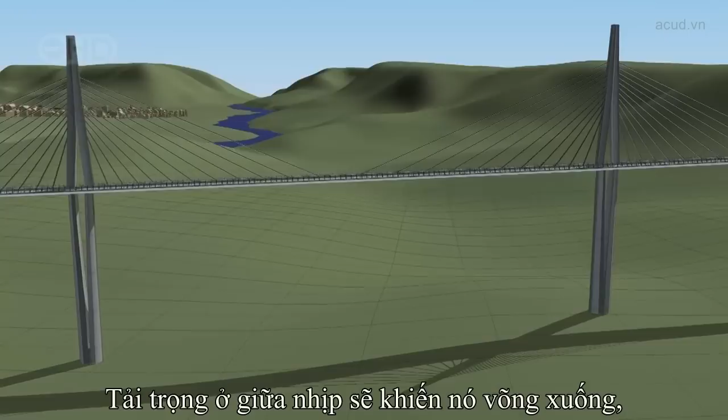On the Millau Viaduct, with its 8 spans, the cables are attached to the deck of the adjacent sections. A load on one section will cause it to drop, pulling the stays down. As the pylons lean in, the matching stays are pulled upwards, lifting the neighboring decks and causing a dangerous rippling effect.

It's right now the team put their bridge to the test. These 28 trucks have a combined weight of over 900 tons. They are now positioned in the critical point, mid-span. The engineers hold their breath. Measurements are taken. The span bends just 26 centimeters. This is a triumph for the engineers. The bridge was designed to cope with more than double that.

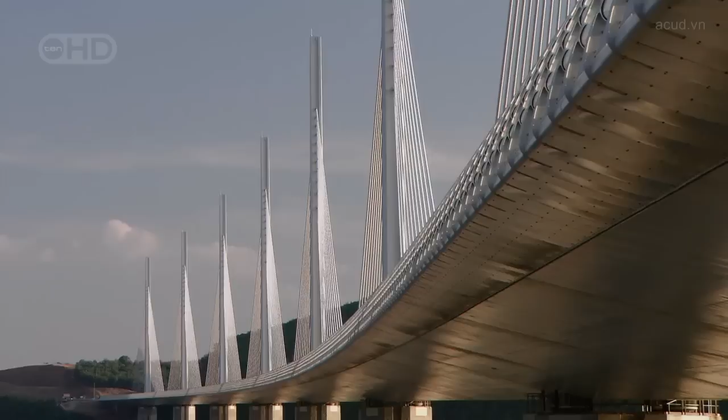4 weeks later, on December the 14th, 2004, President Jacques Chirac officially opened the Millau Bridge. A proud moment for the whole of France. Just over 3 years of construction have produced the tallest bridge in the world, designed to last at least 120 years. And against the odds, the project manager even brought the job in on time. But that's not what he's most proud about. What I remember, because on construction sites there are often accidents, is that we had no serious accidents, nothing more than a minor injury.

As soon as it opened to the public, the bridge was an instant success. But the real test isn't till its first summer, and the French all take their annual vacation. No one ever expected anything like this. Numbers peaked at more than 50,000 vehicles a day. At over $7 per car, that's great news for the construction company, who are clawing back their $478 million investment in the project.

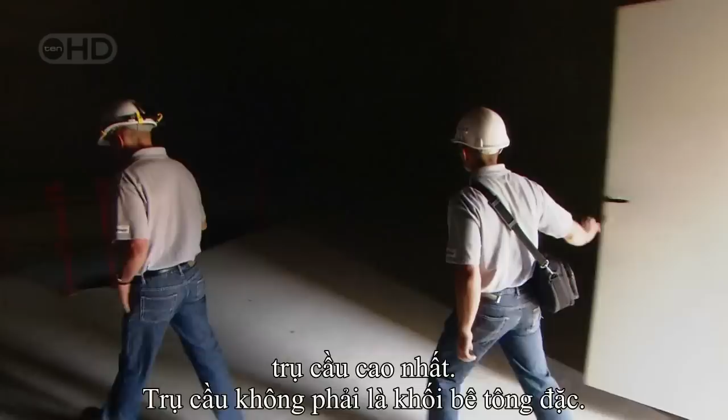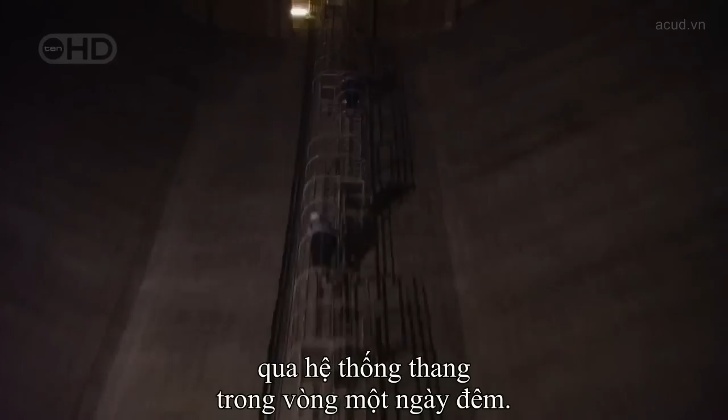This was an epic bridge to build, but it's just as epic to maintain. Thierry and Frank are assigned to P2, the world's tallest bridge pier. This structure is no solid concrete block. It's a series of vast hollow spaces. Their job today is to test the communication system and electric circuits on each of the 7 structural floors. This involves a 343-meter climb, going hand over hand up a ladder for the rest of the day. By dusk, when Thierry finally reaches the summit of the pylon, he may be exhausted, but there is a payoff. You get a fantastic view from here, a 360-degree panorama.

The tallest bridge in the world has become an icon. But this is creating problems no one had ever imagined. Locals have been taking over the bridge as a platform to get media attention for their causes. This crowd was hoping that driving sheep over this freeway in the sky would help them get more farming subsidies. Jose's job is to prevent this kind of incident from creating a danger, and on this bridge, the incidents keep on happening. An alarm triggered by a motion detection system means there's a stopped vehicle on the bridge. Immediately, Jose dispatches a colleague to deal with the situation. The last thing anyone wants is a multi-car pile-up on a 2.5-kilometer bridge, quarter of a kilometer in the sky.

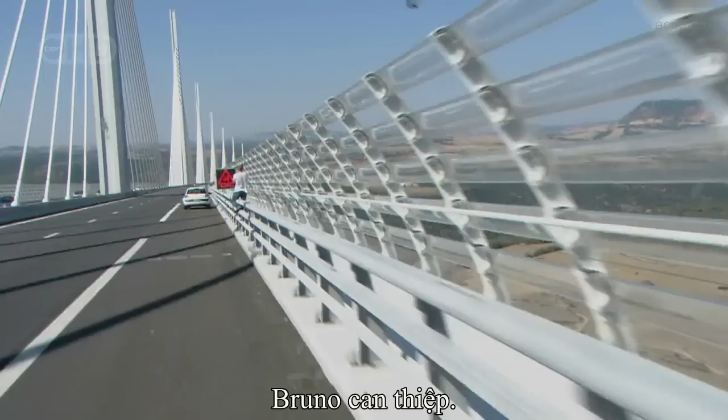Jose zooms in his camera to reveal the man has left his car and is sitting dangerously on the crash barrier. The driver's probably only broken down, but already one man who stopped climbed over the wind barrier and jumped to his death. Bruno intervenes. Thankfully, it's no more than an irresponsible photographer who's sent on his way.

You could say the Millau Bridge is a victim of its own success. It's definitely become a major tourist destination. 700,000 visitors in the first 9 months. Fortunately, most of them wait till they're off the bridge to take their photos. It's magnificent. I came 600 kilometers today to see the Millau Viaduct. There's only one thing to say. It's extraordinary. They're drawn because it's a world-beating structure, but also because it's incredibly beautiful, delicate and minimal. Not what you'd expect from a structure that's nearly a third taller than any other bridge on the planet.

And architect Lord Norman Foster's achieved his aim to give the driver the sensation of soaring. As you leave these plateaus, you do fly. You fly across this bridge. Literally, you are above the clouds. And the result certainly pleases the man who dreamt it all up. To see erected this bridge, which I imagined 15 years ago, it's something magic. This is the longest pure cable stay bridge in the world, the tallest roadway in the world, and of course, at 343 meters, it is the tallest bridge ever constructed.